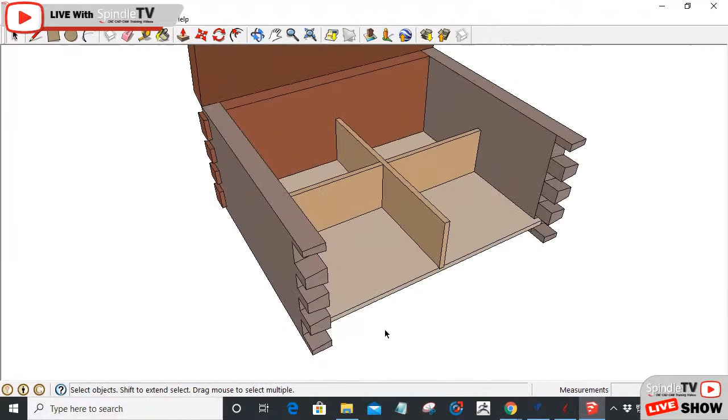This is the 3D rendering I just drew up, a rough 3D rendering of the box I'm going to be making. You can see the pin boards - I'm going to have the pin boards on the side with the tail boards on the front and back. The box itself will be 8 inches in width by 10 inches overall length. I didn't go into great detail on the lid because I'm going to be doing a 3D carving on it, so I just wanted to get the box drawn up.

Let me spread some things out here. We're going to be bringing this file into Vectric, because in Vectric you can import SketchUp files. Many of you may recognize this 3D software as Google SketchUp, which I use quite a bit when trying to visualize something three-dimensionally. I utilize it to draw with and all.

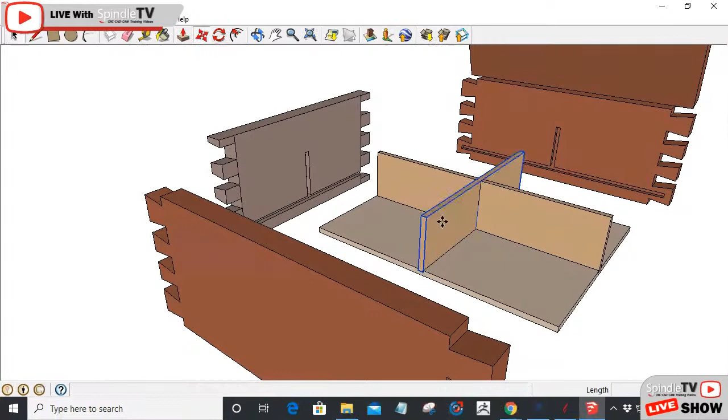In the box itself, on all four parts, there's going to be a 3/16 inch wide by 3/16 inch deep groove across the bottom for the bottom piece of material. For the little dividers, I think I'm just going to break it up into four pieces - I don't think I'm going to go too extravagant on this for time's sake.

Let me zoom in here. You'll see there are two dividers, 3/16 inches wide by, let's see, 1 7/8 inches tall, and they have little grooves cut into them in the center so they can slide over one another into the part.

Now the bottom of the part - if we hide these two pieces for a moment - the bottom of the part is also grooved, about a 16th of an inch deep for those to lay on. You'll see I have the uprights too that'll be fitting into this part, so that when this box goes together, everything will kind of lock in.

I think I'm going to be making it out of cherry. I pulled out some cherry boards. I usually like to do contrasting colors, with a darker color on the front and side, but I couldn't find any walnut and didn't mill up any maple over the weekend. So I just have some cherry that we're going to work with for the project.

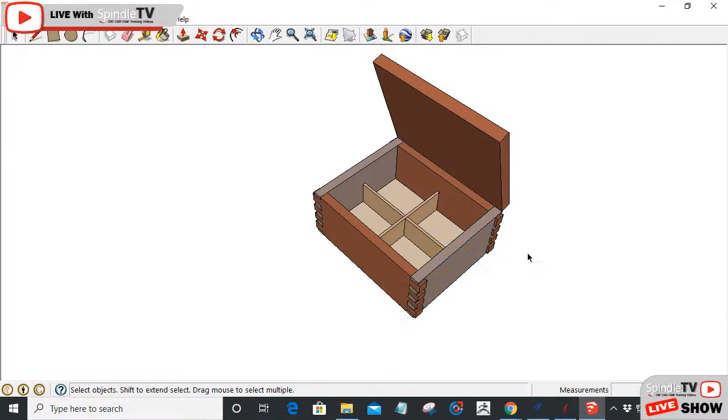We've got one part for the lid, two sides, a front and back - that's five pieces - plus two dividers and the bottom piece, for 8 total. When I go into the VCarve software and import it, it's going to tell me I have 8 parts to import. We're going to import them on the flat, only for the purpose of cutting the little grooves and cutting the dividers out of the parts.

My dovetails, we're going to be designing them separately.

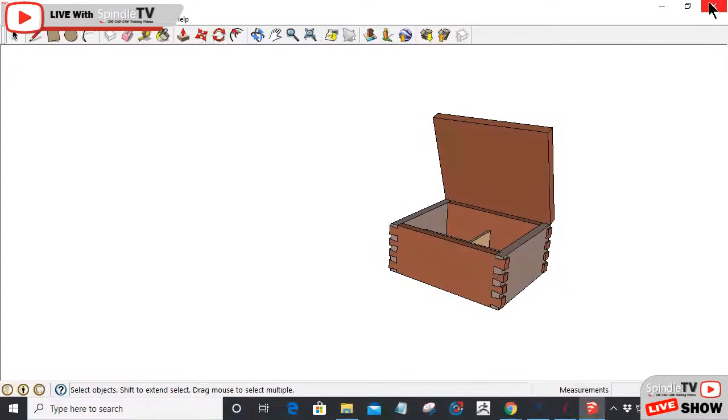So we are going to be importing a vector, and we're going to be importing the Dovetail box here. Now I'm going to go ahead and close out of the SketchUp program. Not necessarily required, but I'm going to close that because I want to get rid of that auto save. While I was working there, it automatically saves those changes in case the computer crashes or anything like that.

So I'm going to open up that Dovetail box SketchUp project here. And when it opens up, we're going to get a prompt. Now, I'm going to be doing an exploded flat view. I want all the parts broken apart. You saw my box was all together in its 3D assembly in SketchUp. Well, this is going to explode those parts and separate them. You can see here that we have 8 parts to import. I'm just going to let the software auto-orientate, and large face is the top face.

Now, if I wanted to, in my SketchUp, I could have painted the faces that I want to be brought facing up in the Vectric software with a certain color, and said orientate by material face color, chosen one of those colors, and it would bring all those faces upward. But I'm not going to do that. I'm just going to auto orientate.

Now, where the software has polygons and stuff in SketchUp, I want it to create circles for those polygons, and fit arcs to boundaries, basically trying to fit arcs to the appropriate SketchUp fillets. I want it to group the imported parts together, and I want it to keep my components together as well. In SketchUp, when you extrude a project into that 3D piece, you can take all the faces and group them into a single component, and I want it to keep those components.

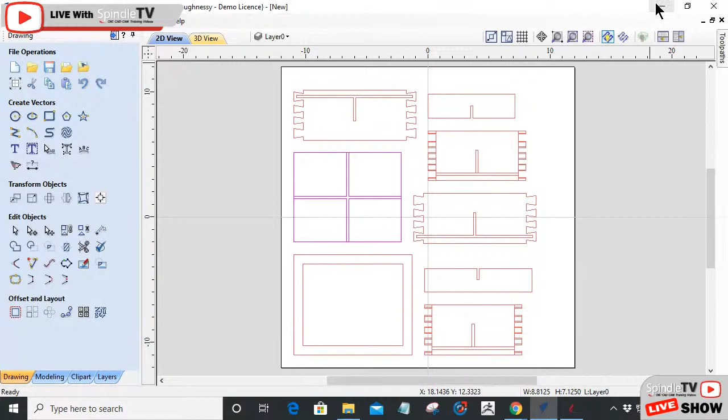All right, let's minimize this and let's get into our Vectric. Now you're going to see a lot of stuff on the board here, but we're going to kind of start over here to begin with. You're going to see a lot of numbers and you're thinking, 'Oh, we got math to do.' No, we don't have a whole lot of math.

The one thing that I've got drawn here is my clearance bit diameter, which is going to be a 3/8 inch diameter bit. Like I said, on my smaller dovetail bits I use a 1/4 inch, but this is a little bit of a larger dovetail bit, and my 3/8 inch bit will work for what I want.

It's new, it's nice and sharp, so I'm going to use it on this project. The dovetail bit itself, like I said, I showed you live. It's the Freud 22115 dovetail bit, and it has a cutting diameter of 17/32, and a carbide length of 25/32. It does have a 1/2 inch shank, and it has a 7-degree angle on that dovetail.

So simply what I've done in the Vectric software is I came in and drew that tool. Now let's go ahead and redraw it again, just so you can see how to draw the bit out. I'm going to use the line tool here. Actually, let's use the rectangle tool.

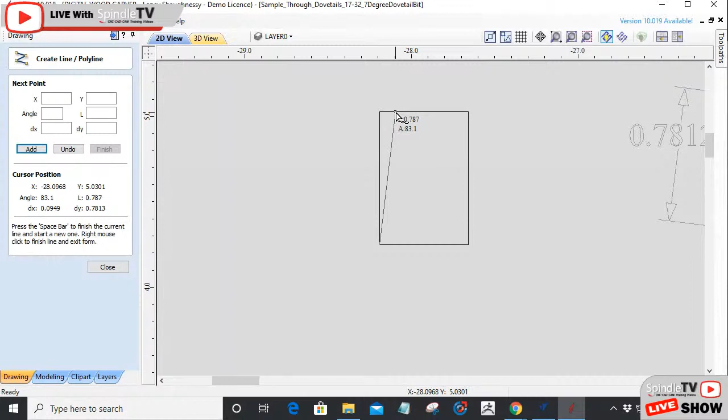Now I'm going to use the line tool, the draw polyline tool, and draw a polyline here. I need to find my angle. It's 83 degrees. I could freehand it, sneak up on 83, zoom in and try to get there and click, and I'd be done. But I want to show you how to use the polyline tool appropriately.

So I've created my start point by clicking down in this bottom left corner. You can see my line is still stuck to my mouse, waiting for some direction. I'm going to come over here to my angle, and you have to remember the software works from 90 degrees: 0, 90, 135, 180, 270, and so on, all the way around to 360. So 90 degrees minus my 7-degree angle is 83 degrees, because 0 is straight across to the right.

I want to go 83 degrees, which will give me my 7-degree angle from vertical. So 83 degrees on the angle, and the length is going to be 25/32. I'll hit equals to get that in there, and I'm simply going to click add. That's going to create that line. Now I'm going to come in here and I could either click the finish button or click my space bar to finish that. I'll just click the finish button to create that angle, that length.

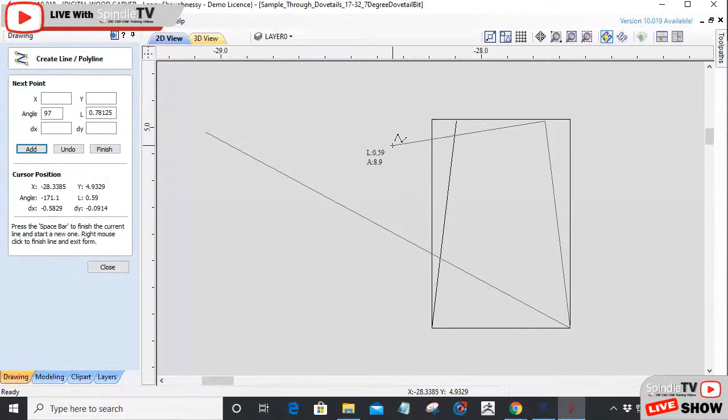Now over here, I'm going to do the same thing. This time I've clicked to start the line, but now I'm going past 90 in a positive direction, so it's going to be 90 plus 7, so 97 degrees, same length. I'm going to click add to create that line. Now notice my other line over here shot over. I'm going to hit finish to finish this line and it'll go away. That line was just there because I dragged my mouse over to click add, but as soon as I clicked finish, it got rid of it.

Now that I've got the lines drawn out, I'm going to take my box here, grab it on the top, and snap it down to the top of those lines so I can use my scissor tool. I'm just going to click here - I don't want this line at the top, so that's a span. I'll go into node editing, right click on that line, and delete that span. A span is a line, arc, or curve that is between two nodes.

So how many of you did I lose just on drawing the bit? Hopefully none - hopefully I didn't lose any of you.

Now let's get out of node editing on that bit and look over here at what I've got. Basically I've drawn out the diagram and given myself some information - what my clearance bit diameter is and what my dovetail bit angle is. That bit that I drew, which is the same as this one, I'm actually going to use it in the setup over here, and we're going to talk about the setup in just a second.

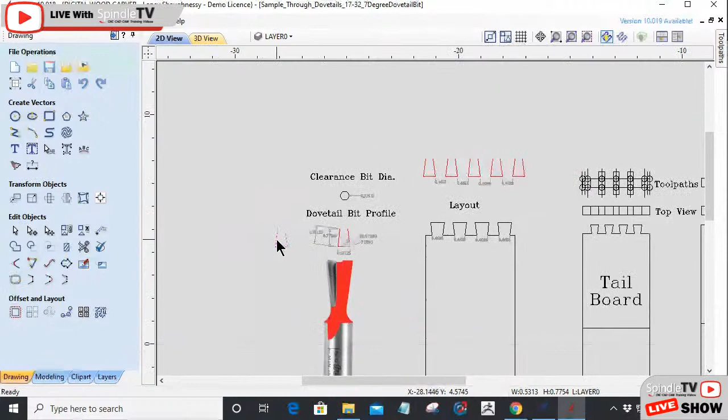Now you can see that dovetail bit - I have drawn it up here at the top. And I would like 5 dovetails to go across my piece, and I would like them spaced accordingly.

Now my part is only 4 inches wide. Let me put that 4 inches in there, and let me get it snapped to the center there.

Snap - there we go. And what I would like on my dovetails is half a pin on each end, and then 3 pins spaced out evenly.

Now how did I lay that out, or what was the easiest way to lay out how many pins I want? Because I could get rid of pins and have it as a 3-pin thing where I just have one big dovetail in the middle. It doesn't have to be the size of your bit - you can lay out your dovetails as long as your bit can cut the part. I could have one big dovetail in the middle and 2 half pins on each end. I could do all kinds of things.

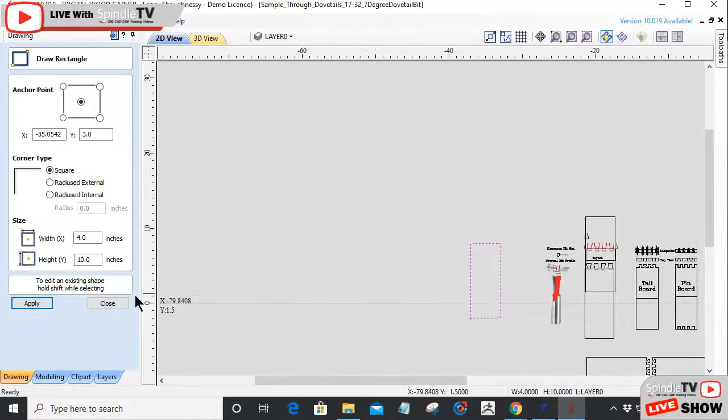Well, let's come over here into a blank spot and I'm going to draw my piece - my front piece, my pin board or tailboard, sorry, tailboard. It is 4 inches wide by 10 inches in length. Okay, so let's click over here and create that. Let's get rid of this one where I accidentally double clicked.

Now if I take that dovetail that I drew out for you guys just a second ago, I'm going to come over here and snap. I've got smart snapping and geometry snapping on, but I've grabbed that dovetail right in the center, and you can identify the center by that little diagonal mark on your cursor when you hit that center line. When I'm in the center, it'll snap right to it. So I'm snapping that right to the corner here.

Now, I will hold down my control key while I'm in transform mode. Transform mode is when you double click on the object and put it in transform mode. Or I could use this tool, called transform mode, which does the same thing when I select an object. In transform mode, my control key allows me to make copies when I drag my part around.

So if I hold my control key down and grab that part in the middle there, I am dragging a copy, and I'm going to snap it to this end. This is going to represent my 2 half pins on each end.

Okay, you guys with me there so far?

Now I'm going to grab my control key again, and I'm just going to grab this part up here. I actually want 3 more pins in between here. I want a total of 3 and 2 half pins on the end. So I'm going to hold my control key down and drag 3 more out here. Just holding the control key down.

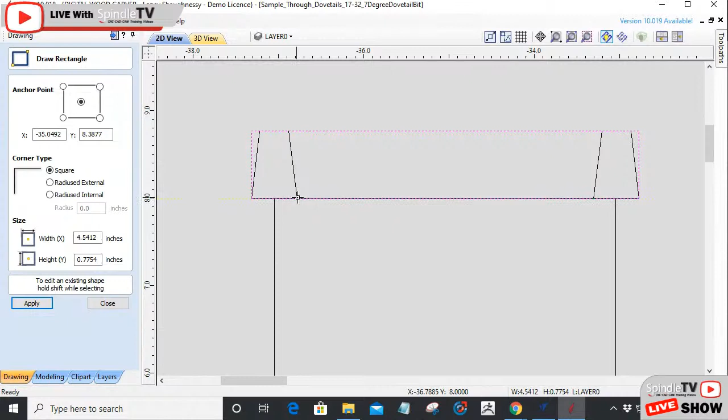I got those down. Now I'm going to utilize my alignment tool and my rectangle tools to help me lay out my pins. First thing I'm going to do is draw a rectangle that's the width of my 2 bits here. I'm also going to draw a rectangle on the inside, right here on the inside of that right side of that bit, and I'll snap to the inside left of this one. With that, I really don't need this outside rectangle, we can get rid of that. We just have this in here. I just wanted to show you my overall length.

Now, this is the space to which I want to space each of these 3 pins equal distance. Between my 2 half pins, I want these spaced equal distance between the 3, from this point to this point. Y'all still with me? All right.

So here we go. I'm going to select my 3 parts first, hold down my shift key and select my inner rectangle here. Well, inner rectangle, yeah, technically it is. I'm going to open up my alignment tool, and I'm going to be aligning to selection, aligning the selected objects to the last item in the selection, the last item I selected. So I'm going to center them right now in there, and they're all stacked on top of each other right now.

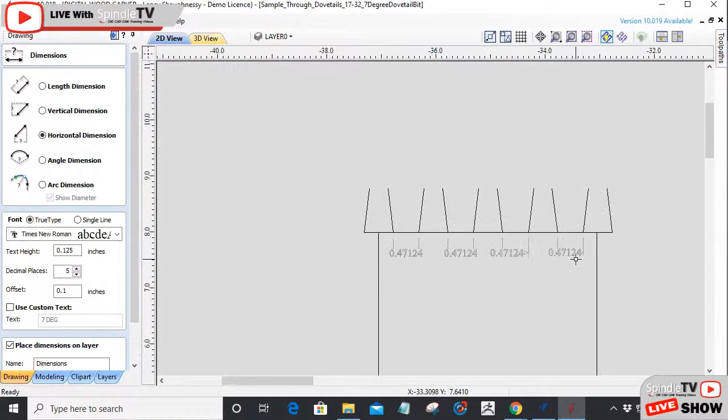Now, just for kicks and giggles, if I were to measure horizontally between each of these parts, I would be equal distance. All right, and that's the setup that I want. That's what I want, you know? So let's go ahead and close that. Let's get rid of these dimensions.

All right, now we're going to start the layout. Our goal is to end up with a part that looks like this. I'm going to go ahead and delete these numbers, they don't apply right now. So my goal is to end up with that part.

Now, key thing is, how thick is my material going to be? My material is going to be 5/8 of an inch thick. The walls of my box are going to be 5/8, and it's a heavy box—that's not a thin box. Typically walls for jewelry boxes are going to be 3/8 or half inch and everything, but I want my box's walls to be 5/8 of an inch thick.

So imagine that if we go from a side view here, imagine if I have my—let's go 0.625. Oops, not 625, let's try 0.625. And let's draw another rectangle here and make that 0.625.

When my front pieces fit into my side piece, that dovetail cutter has to cut that 5/8 of an inch thick, or 5/8 of an inch deep if you will, so those two parts can fit together. Now I'm actually going to overcut by a 16th of an inch, not an eighth. I like to have my parts slightly proud when I assemble them together, and then I will sand them flush, nice and tight and right.

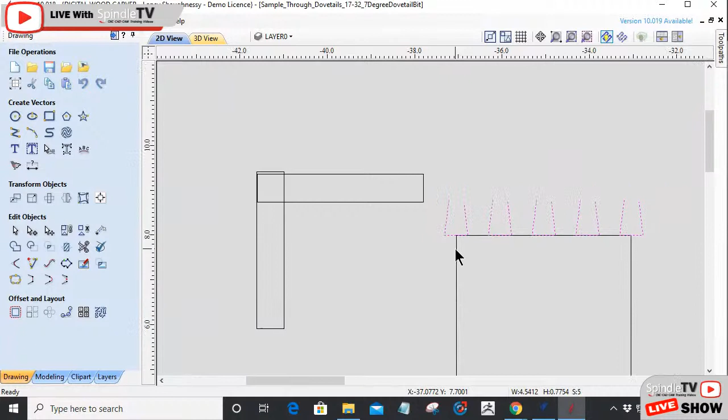So that being said, I need to move these parts down my 5/8 of an inch plus that extra 16th, right? So I'm going to come over here to my move tool, and I'm going to move relative to its current position on the y axis. Y is up and down on your screen, and I'm going to move down, so that's a negative number. I'm moving 0.625 plus that 16th of an inch, a total of 0.6875. I'm going to put my negative sign in the front and click apply.

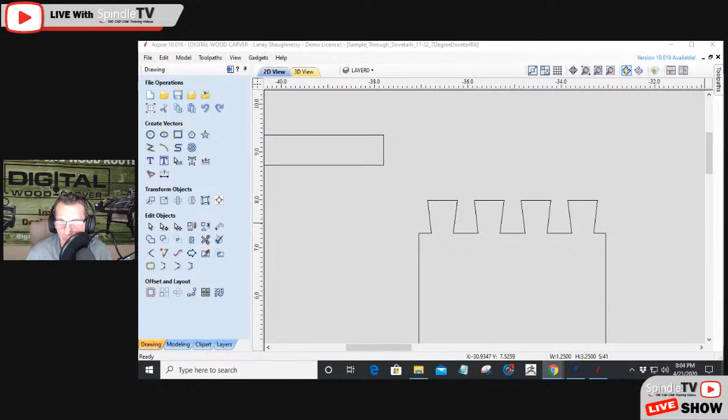All right, so we've got our tail board created. Now phase 2 of this project, phase 2 of the creation. You see these boards down here? Phase 1 is creating the layout, and that's what I did. I created the layout. So if I were to delete this box and drag this over, which you don't have to, but let's drag it over. All right, that's my layout, okay? And we don't need this over here anymore. So I've created the layout for the dovetails that I want.

Now I've got to create the pin board. And how am I going to do that? Well, this little graphic down here should give you a slight indication. It's not quite a mirror of it because these are positive, these are negative, but that's how we're going to generate that. So let's go ahead and delete these out of here. And I'm going to take a copy of my layout board, hold down the control key and drag a copy down. I'm going to hit the number 0 on my keyboard to turn it 90 degrees, hit it twice so it rotates because it rotates in 45-degree increments. I've got it laid out here.

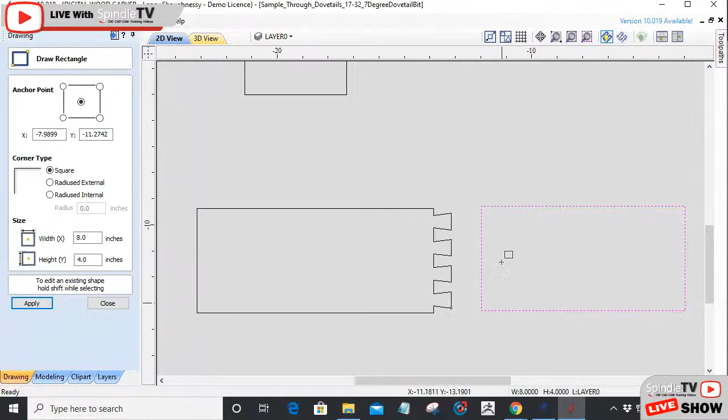All right, now my pin board - pins and tails, my pin board - is also 4 inches in width, and it has an overall length of 8 inches. Now these overall lengths and everything are not important. You're going to cut your pieces down to size. What's important is how those pins and tails are laid out, because we're actually going to be cutting on the end, like we're looking at an end view of the board. So the end view, or top view if you will, like looking at a board from the top down when it's in the vertical position.

Now, if I came over here and took this piece and snapped it right to here, you would think I'd be able to just cut the vector here, copy and paste it, and then trim everything together, blah blah blah. And it doesn't quite work that way. What we want to do is use our tails so that we can draw our pin layout. We're going to actually use the Polyline tool for this - it's just going to be a series of clicks. We're going to click at the edge of our board here, come and click on this inside corner, click on this end over here, inside, this one at the end, over here on the inside, and I'm just clicking. When I get to that point, I'm clicking.

This is much easier in 9.5 and 10 with the smart snapping and geometry snapping, but I used to do this in version 8, 8.5, 9, and 9.5, using the space bar to finish the line. So it can be done on all of them.

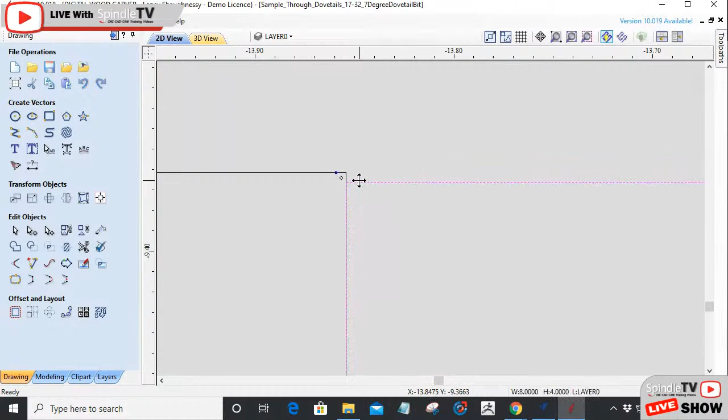Lord have mercy. One more time. Y'all needed to see it again anyway, right? All right, one more time. So here we go, we're going to start at the edge. I should have checked that before I started talking smack. All right, let's go over here, and we're redrawing.

All right, space bar to finish off the line. Now I have this polyline, and I'm going to hold down my shift key and select this, my pin board piece, and we're going to slide it back. And there's our layout here.

Now that I have that drawn, I'm going to come in with my trim tool, and I'm going to trim away in between these lines to create that negative layout.

Now I've got these two lines right here overlapping, don't want that. So I'm just going to take my trim tool and click it once, and that should have joined that one. You can see my other individual lines right there now - I can select them and hit delete on the keyboard to get rid of those.

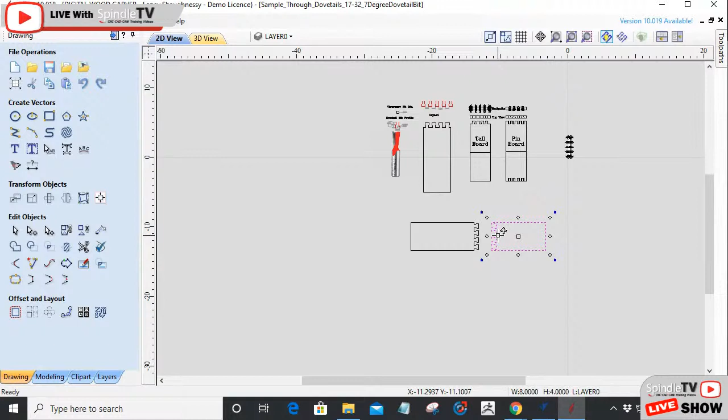Now, phase one was layout, getting the pins laid out. Phase two was creating the tailboard. Now we're into the final phase, setting both of our pin board and tailboard upright and creating the vectors for the tool paths.

So I'm going to hit the number 9 on my keyboard this time and turn that vertically counterclockwise. I'm going to hit the number 0 on my keyboard and turn this vertically clockwise. And this is going to replace...

Let's get rid of this, and this. Hit delete. And we're going to bring these guys up into place.

Tried to lay this out the same way I learned, but also for you guys. Now notice I didn't make copies, I just brought them up here. I don't really need that layout down there, but layout too, you know.

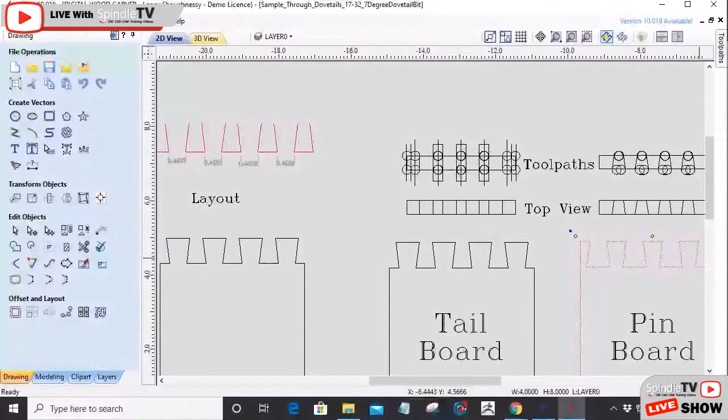So hopefully y'all are with me and this is not boring to death, but we are reaching the final round here. Now at this point in time, you can see I have all these layers from past projects and everything, and what I want to do is start fresh with you guys and girls.

So I'm going to come in here and turn off the vectors over here, which is going to be my board in a moment. You'll see that job setup in a second when we get into the job setup.

I'm going to add a new layer and I'm going to call this - evidently it's going to yell at me for that, there we go - I'm going to call this our class tailboard, and class pinboard.

I'm going to take these two vectors here and here, and I'm going to move them, well, one at a time, Laney. Tailboard, I'm going to go ahead and move it to the tailboard layer.

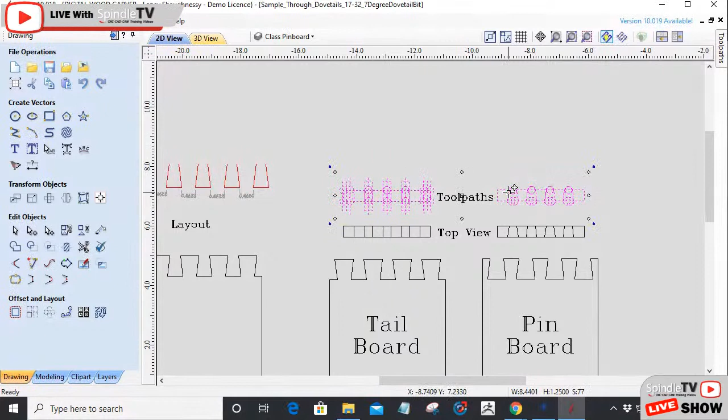and all of this, and I'm just going to move it up out of the way. It's going to be in your eyesight, you'll be wanting to stare up at it, but we're going to draw two new boxes. Same thing with this and this, we're going to move that up here because we're going to draw two new boxes.

So our boxes are going to, you guessed it, be the size of our part. So 4 inches wide by the thickness of our piece, because we're looking at a top view, 0.625. Okay, and I'll have to move this all over. Let's do this one. 4 inches wide. 0.625.

All right, let's get some things lined up and cleaned up and everything here. Move that to the side. And for those of you with OCD, let's get that somewhat centered here. I'm gonna drive y'all nuts, you'll be like 'I can't pay attention, Laney, man, get that shit fixed.' All right, let's go over here and slide this over a little bit.

And let's take this and slide it over a little. Now, the key to all this is we absolutely have to have things in alignment for these two boxes for this next layout procedure. So I'm going to snap to this edge here and then just bring it straight up so that I'm in alignment. Same thing here, I'm going to grab this one right on the corner, snap down here, and then just raise right up along that dotted line.

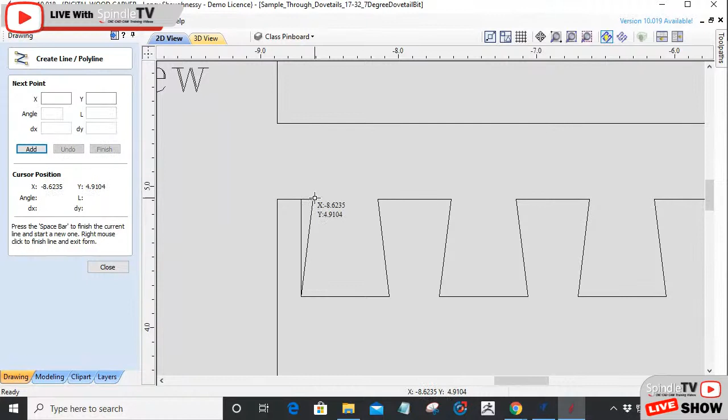How we get it to look like a pin board is we're going to draw some vertical lines from all of our points, our inside and outside points. What I mean by that is from this outside point here, straight up, 90 degrees, space bar to finish. And this inside point right here, straight down, 90 degrees, space bar to finish. Here, straight down, 90 degrees, space bar.

And on this corner, straight up, 90 degrees, space bar. Now, if I came in here with my scissors and trimmed away those two middle lines, what we're getting is a representation of that angle, that offset angle. You know, you got to use your imagination on that.

And so we're going to repeat that for all of these. It's important that we do because we got to extend these lines up into our part up here. So we're going to go straight up. That was not straight up, I'm going to undo that and undo that. There we go. I accidentally clicked when I shouldn't have.

Space bar to finish. Over here, straight down, space bar to finish. Here, straight down, and here, straight up. All right, I'll come back and trim those lines. Let's just keep going with the Polyline tool while we're at it, on the inside and outside corners. So the outside corner here and the inside corner here, we're just snapping and drawing a 90-degree line up and down.

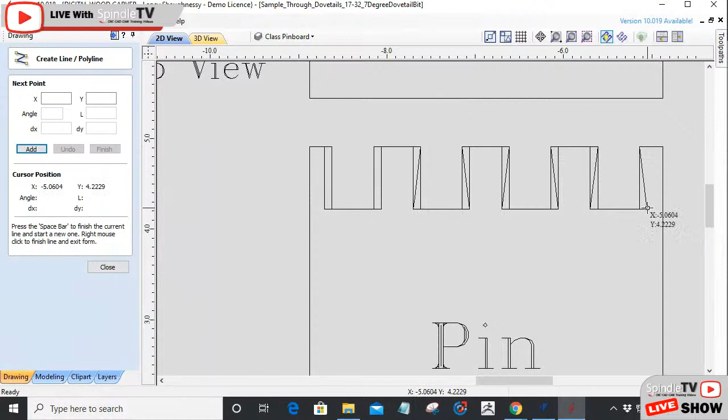One more. All right, now I can come in with my scissor tool and trim away those diagonals. And now we have an official looking tailboard and pin board.

Okay, all right. Now, for those of you that may be just slightly lost on that pinboard tailboard, let's open up our 3D view and take a look at them in a 3D rendering real quick.

All right, let's go in here and let's take this piece, this piece, this, and this, and let's hide those. And let's look at, let's move this one out, and let's take a look at this one here. Now I'm going to rotate, I'm going to orbit around this one here. And on this side here, let's go with a straight camera view, camera, standard view, front.

How about back? Camera, standard view, back. There we go. All right, so this is my tailboard or pin board. Yeah, tailboard, sorry, this is my tailboard. Let me get the blue off there. And let's spin it around here. So very straightforward as far as that tailboard goes. Same thing as what we're looking at here.

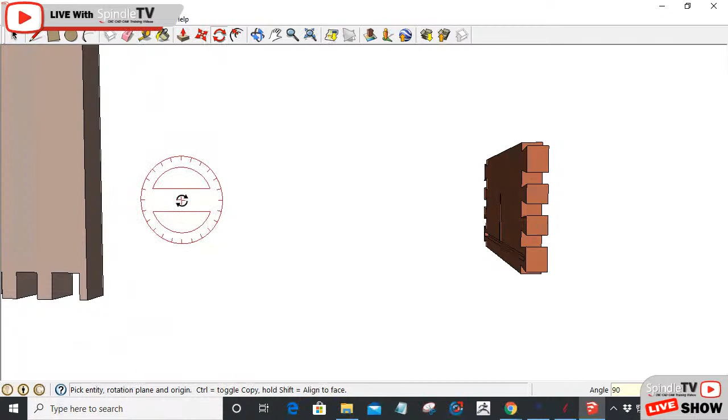Let's look at it from the end, and I'll tilt this ever so slightly. That angle we're seeing, those lines we drew, if we put this in a vertical, that outside line represents the outer part of that angle, and the inside line here represents the narrow part of the angle. So that's what we're looking at when viewing it straight on.

Now, the individual boxes I drew up here where we're extending our lines, that's basically going to be a representation of a top view. If we were looking at this board from the top down at that end, that's what we're going to be creating next.

So when you were looking at that vertical piece and wondering what those lines were doing, it's basically kind of emulating, in your imagination, that offset of that angle cut. All right, cool, let's get back to it. Now you can see it, right? Your eyes are like, oh, I see it now.

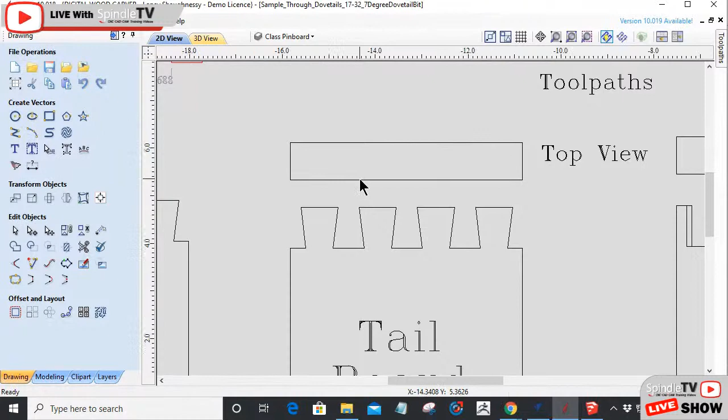Now what we have to do is extend these lines up to create our top views. On our top views, we have to extend the lines up, and basically we're looking at the top view of the tailboard here. It's just a box with lines in it. But the pin board is going to have those angles you see there.

I'm like, how did you get that? All right, let's figure that one out. So coming back up here, we have this is the pin, and the gap between the pins. The wide ones are the gap between the pin, then the pin, the gap, the pin, right?

So what we're going to do is create, with our polyline tool, basically from down here, extend a line straight up. Actually it needs to be on the top of the pin. Straight up, space bar to finish the line, repeated for each one.

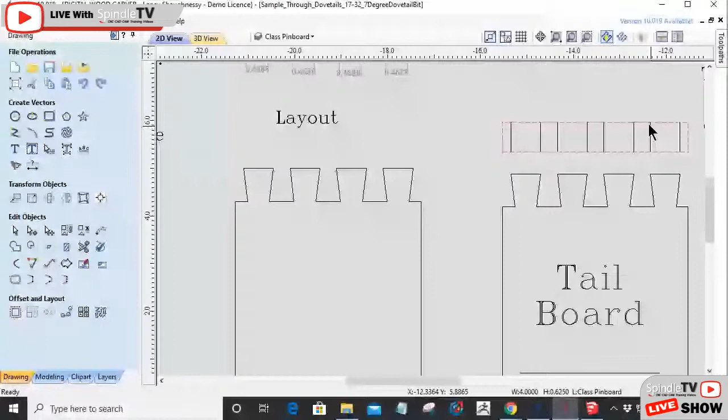Because our router bit, our tool paths are going to be cutting here in these areas, that's where our router bit's going to be cutting. Not at an angle like that, or it'd be a bad day for it. All right, so we've got that one drawn out.

Now this one, we've got to be able to pocket out these areas. And for this, we have basically a line where our angle is going to start and where it's going to end, to create that offset, that angle cut. So let's get that one drawn and see, we'll do one and you can see where I'm going with this.

So now on this one, basically I'm just connecting that to here, and this one I'm going to connect here. And if I were to connect a line from here, I could come in with my scissor tool - that would create that first angle that's in it. We're going to do that all the way down and then come back and clean up our lines.

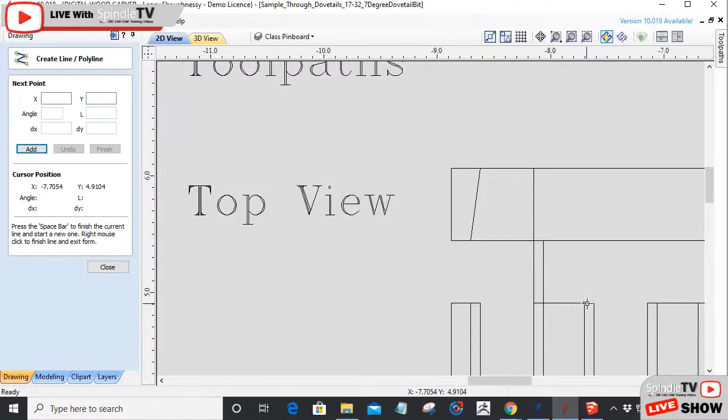So this is the inside of the angle - inside line is short, outside line is long. I'm hitting the space bar after I click to lock in that line, hitting the space bar to finish the line. Outside line is long, inside line is short, inside line is short, outside line is long.

We're getting there, we're almost to the fun part of creating the toolpath layout. Hopefully y'all are finding something helpful in this. Outside line is long, inside line is short. All right, with my line tool, I'm now going to connect these two points.

Just connecting these two points, the short line to the end of the long line. Then I'm going to take my scissor tool and get rid of all these cross lines here, and then my straight lines here. All right, and that is a top view of my pin board.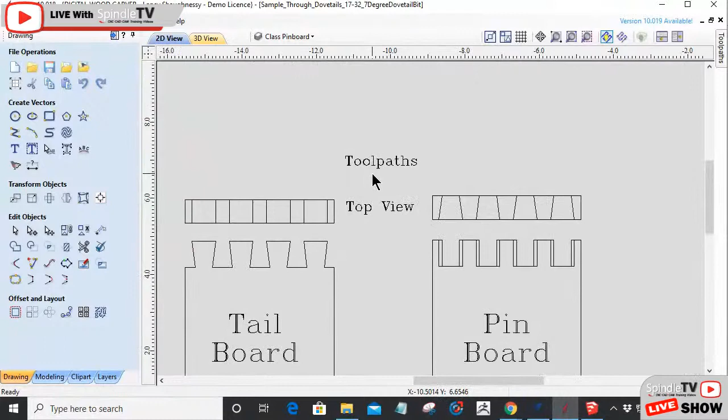Awesome. All right, now the fun part. Now comes the layout for the toolpath. Now this is going to involve our diameter of our bit, this is our end mill.

So all the circles here are representing a drilling toolpath that our bit is going to come down and drill to hog away the waste material. The lines here are going to represent an end mill cut, on these short lines here, not this long one. The short lines represent where the end mill is cutting to hog out extra waste material here and here. And then the long lines represent where the dovetail bit are going to be cutting.

And the rectangles kind of represent a pocket cut. Over here, we have a drilling toolpath where these circles are, and a pocket cut where this kind of cam is created. That's for the tailboard. So that's what we're going to be doing here.

Okay, so what we're going to do is take our parts, our top views, and simply select them. Hold down your shift key when you want to select more than one item. Double click to get it in transform mode. I'm going to hold my control key down and drag them up here to the toolpath section.

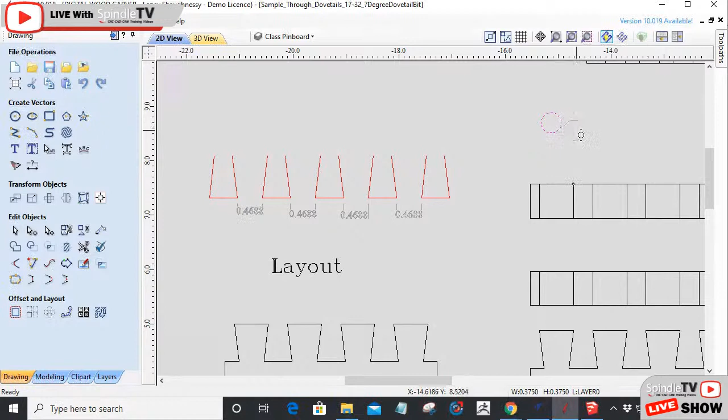Now, first thing we got to know is I'm going to come back over here to my end mill. I'm going to hold down my control key and drag that end mill over, because that's going to represent the end mill I'm going to be using, my 3/8" bit. Now, the key thing is that bit is going to be drilling in these narrow voids here, and it has to fit. If the bit won't fit, then you're going to be cutting into your part and all that stuff. And right now, as my layout sits, my end mill is not going to fit.

So let's measure and see how off we are, because I may have to go back to my 1/4" end mill that I use every day. This was the first attempt of wanting to use a 3/8", but not going to have it.

So let's see here, let's grab a horizontal measurement from here to here. All right, 0.362. 0.375 is my end mill bit, 0.362, it's not going to fit. Okay, so I do have to use a 1/4" end mill, which is fine.

What I'm used to using all the time. I just thought I'd be able to use my bigger bit. And if my dovetails were spaced out further, then I would have been able to use it.

But so we're going to change this up real quick. We're going to come in here. I want to keep things consistent, so I'm going to go into the size tool and change this back to 0.25.

And I'm going to go into my measure tool. I'm going to measure an arc with the dimension. And if I click on this, I can drag that out and click there, 0.25" diameter.

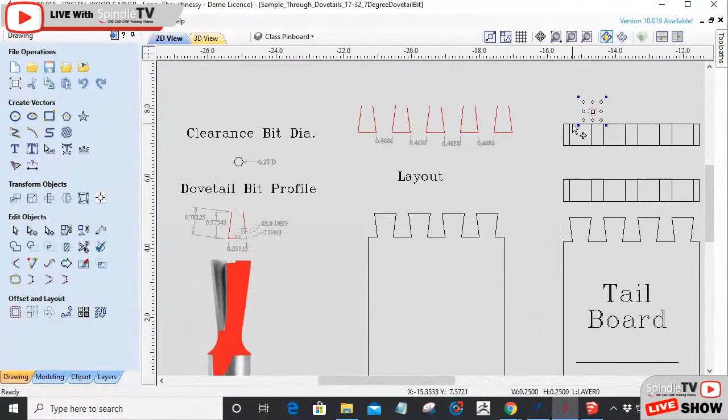All right, so on our layout now, what we need is all of this. I wish I could... here, let me see if I can. Bear with me a second, let me see if I can do something. Let's go... W, no, not there. 0.125.

W for waste. And that's what's centered. And this is my T for tail.

Okay, let's take these two and hold down that control key. Drag this over here, let it go. Hold down that control key, drag that over there. That up for a minute. That over there. And snap.

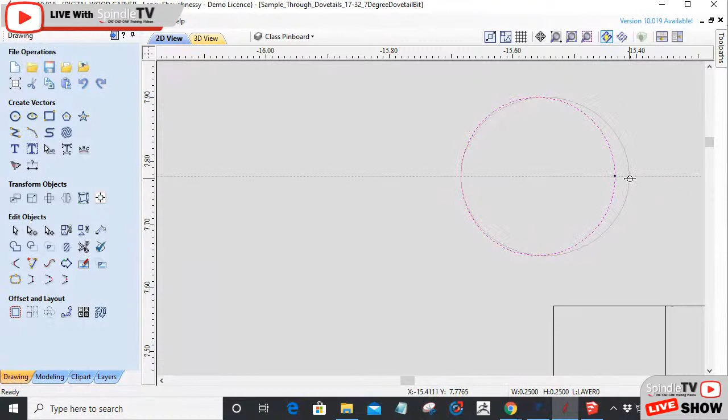And that's what I wanna drag that by. I don't wanna drag it by this because I'm stretching that little white box. I wanna drag it by the actual line on that node because that's gonna give me the point that I can snap the center of my bit to the edge of my cut on that waste area. So there's gonna be a drilling tool path that's going to carve away that waste material here, right?

Okay, same thing. I'm going to hold down my control key and let's get this kind of front and center on the screen like that. And I'm going to hold down on that edge, hold down my control key, grab that, and snap this there. So that's my second drilling operation.

All right, it's going to drill down and remove that edge waste. It's going to help me, to the best of my ability, prevent tear out. If I'm just going back and forth clearing out like a pocket with the end mill, I have a tendency of creating tear out because I don't have a backer board. This is also going to help reduce some of that waste on my edges to remove that tear out and stuff.

Now, my 1/4 inch end mill, because of the size of the waste area, that one cut will do the two ends. I don't need to double it up like you see up here, because my inside area is not as wide, right? I'm using only half a pin here, and it's less than a 1/4 inch wide.

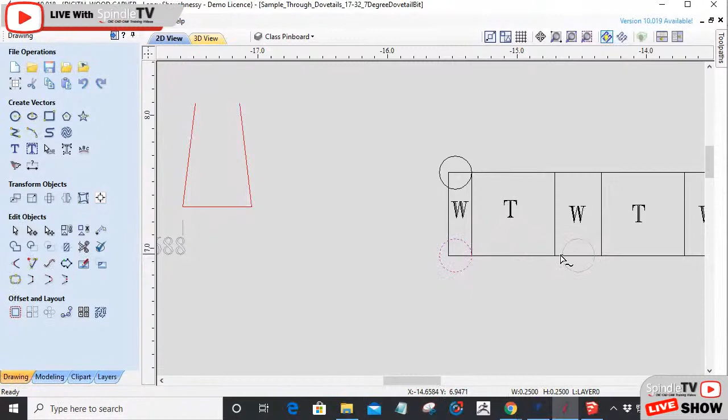Okay, grab this side, hold down my control key, and snap to this side. So the bit's going to drill down here, it's going to raise back up and drill down here, and it's going to remove this section.

All right, now I can very easily hold down my shift key and select both of these and hold down my control to copy. The reason why I held the shift, for those of you that are new, is when you're selecting more than one object, you hold your shift key. Okay, I'm going to double click to put it in transform mode.

And I'm going to grab that left corner, or left edge should I say, and I'm holding my control key so I can make a copy. And I'm going to drag that copy and snap it up here.

Y'all awake over there? I should be like Emeril Lagasse and go 'bam' every once in a while, make sure y'all stay awake. Don't fall asleep, all right.

Let's go ahead and again, I'm going to grab it - doesn't matter what side I grab, I just make sure what side I snap to over here. And I'm a left handed person, so I'm grabbing from the left.

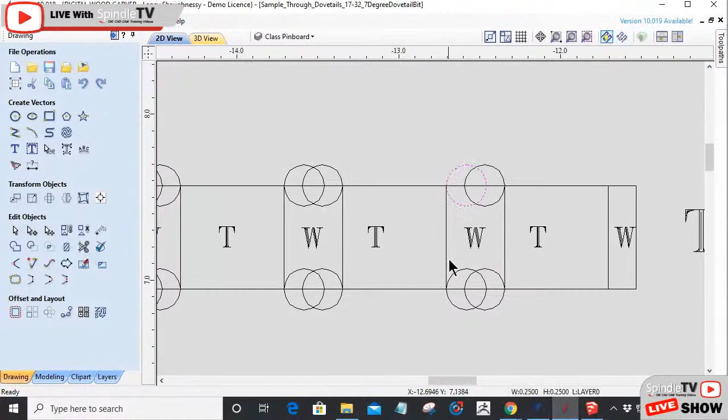I'm going to hold down my control key and drag a copy over, snapping it inside there, snap it to there, and snap it to there in those waste areas. Then, I don't need two circles for that, so I'll hold down shift, select these two, put them in transform mode, grab it at the bottom, hold control down, and snap those two there. So those are the vectors for my drilling toolpath on the tail board.

Okay, the circles are the vectors for the drilling toolpath.

Now with that same quarter inch end mill, I'm going to have it do a clearing pass on this outer edge again to prevent tear out. This one's not as wide, so it's just going to do one clearing pass on this outer edge. The center of these circles represent the center of my quarter inch router bit.

So I'm going to use a line tool now. The line is going to be my vector for my profile toolpath. I'm doing a profile toolpath, and I'm going to snap right to the center of this circle here and snap to the center of that circle there.

Now that line, I don't want my bit to start here and end here. I need it to extend past the part. I want it to start outside the part, travel through and past the back of the part, raise up, come back over, take its pass, raise up, come back over, take its next pass, and so on until that area is cleared out down to that 5/8 of an inch depth of cut.

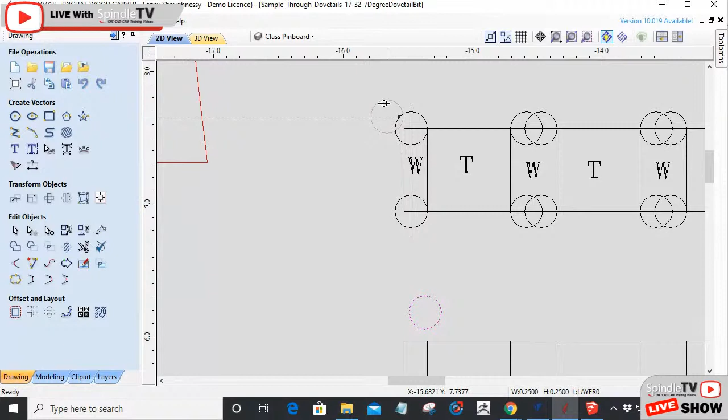Okay, my profile vector. Now completely opposite of this side, I started down here for that climb cut, but coming back over here, I'm going to have the router do a conventional cut in this direction to not tear out. So my start point is actually going to be up here for this one. So I'm going to climb on the left, conventional on the right.

All right, let's go into here. Again, I'm going to find the center of my circle, snap to that and to the center, space bar to finish. I'll select that line and size it from its center up 1 inch to 1 inch, and that'll extend in both directions that 1 inch. So that's my two end cuts.

Now in here, my bit is going to be making 2 passes. It's going to drill out this area here, this waste area. If the area was wide enough where there wasn't a whole lot of waste, I could just do a single pass, and I may just still do a single pass if it were narrower grooves.

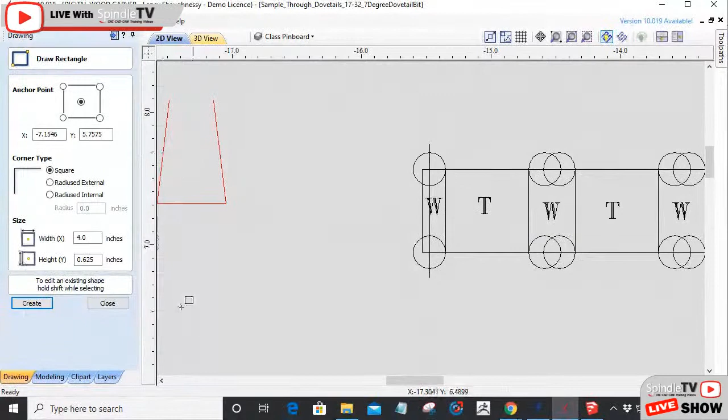That's what those rectangles are there for, and I'm an idiot that I almost forgot that—I would have had you running profiles in the middle. All right, pocket cut, ladies and gentlemen. So in here we're going to do a pocket cut, and I'm going to grab a rectangle tool and draw a rectangle here, and that rectangle I want to be 4 inches in length.

Okay, so it's going to come in and pocket this out here with that 1/4 inch end mill. And it's also going to pocket here, here.

Now, when I clicked over here on this one, it wasn't centered, right? Don't make that mistake. Go back and look at your vectors and all that good stuff. This one got moved. It's got to be right on the line, ladies and gentlemen. This one here, I overshot in this direction because I was full of myself. And this one here, I got just right.

All right, so the rectangle vectors, the drill out here is going to drill out to prevent that chip out on the edges. And then my pocket cut is going to come through and clean out the rest of that waste material down to that 5/8.

All right, almost done. We got one more cut, the actual dovetail cut. Now, the dovetail cutter. So all this is going to be cleared out with our end mill. Then our dovetail cutter is going to come and cut those dovetails, that angle cut, that final angle cut.

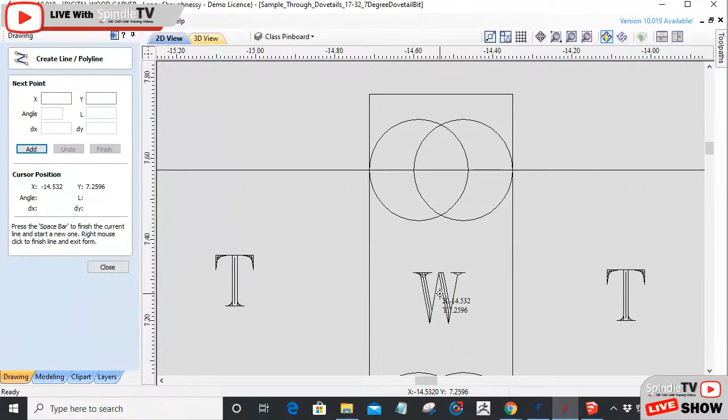This time I want to find the center of my rectangle here because that's going to represent the center of where my dovetail bit is cutting. And the dovetail bit is going to be cutting right through here.

Okay, and on this, my dovetail cutter is much wider in diameter, right? So I need, and I'm going to hold the shift key down. Hold the shift key down. I need to extend these lines a little bit longer. I'm going to draw a circle here that my dovetail cutter just in 17/32.

Let's hit equals. If I click here, okay. So again, the center of my bit, right? I don't want my bit coming down right on the edge of my board. I want it coming out way off my board and everything, clearing its path. And also, if I want to be, let's say, that far off my board, there's my center, so my line has to be extended out to here on both sides.

Okay, so on this, what I'm going to do is I'm going to hold down my shift key and select all three of these. I'm going to put it in transform mode. And this time I'm going to hold my shift key to keep these objects centered. But now I'm going to drag this line and stretch it out.

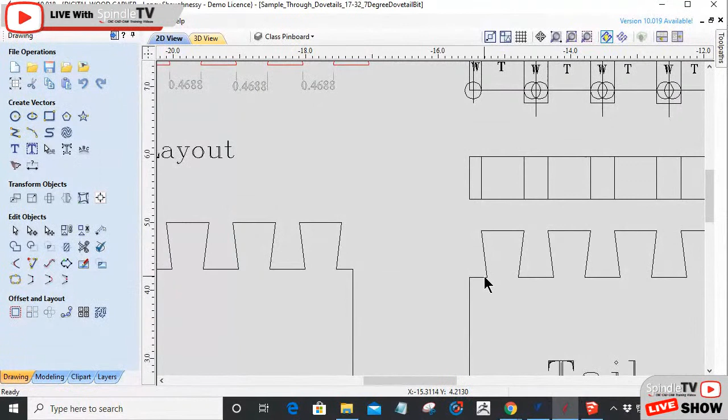Okay, now my dovetail cutter also has to come in and cut these edge cuts here, right? So I need to know where that vector line needs to be on both ends. So if I take and snap the edge of the bit, which this line here, got to understand something here. This line here, right here, this vertical line is representing this upper part, right? It's not representing down here where the actual edge of my dovetail is.

So what I need to do is I'm going to draw a polyline, a very long polyline from here all the way up to here. And that's going to represent the edge of where this 17/32 cutter needs to cut. Let me undo that line there. Let's get back into regular mode here.

And so, that edge of that cutter needs to cut here. All right, that's where that cutter's cutting. Now, the center of the cutter is way over here.

And so if I were to use this line to make a copy of it, hold down my control key and grab it at the end, I could snap to that. And that gives me the vector line that my dovetail cutter has to follow.

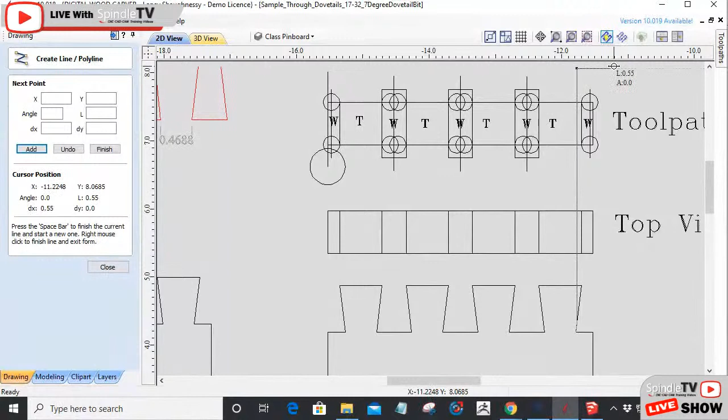Okay, same thing here. Let's get rid of that. We don't need that line any longer. I'm going to draw a line representing the inside of my cut. This is why it's important that all these things be lined up together in a row, because we work off of them. Draw a line 90 degrees straight up. Space bar to finish. I can take my circle, drag it over here now.

Okay, I want to get the center of my circle in line with that line there. So I'll snap it right there. Now I'll use this line, hold down the control key to make a copy of it, and snap it to the center. That's going to be the vector line.

So we've just finished creating the vectors for the tailboard toolpath.

Now I'm going to take all of these vectors, right click, and copy them to a new layer called class toolpath vectors. I'll put TB for tailboard. And that copy, while it's still selected, I'm going to drag it over here because we'll be using it in a few moments to set up our toolpath.

Sprite, yeah Cecil. I stopped drinking Dr. Pepper. It put me in the hospital, so I had to start drinking Sprite instead. I was supposed to be drinking juice, but I couldn't give up soda altogether. When you're hunched over crying like a baby because you're passing a kidney stone, it's time to give up some Dr. Pepper. That's the worst pain I ever experienced in my life. God bless women who can endure pain.

Okay, so now we've got to create our toolpaths for our pin board. Very similar to the tailboard, we're going to have drilling operations, and then we're going to have a pocket cut.

So I'm going to snag one of these quarter-inch circles over here, hold down the control key so I can drag a copy over here so we can use it. Why draw what you can copy? And here, if we need some W's and T's, let's drag a couple of W's and T's over too, holding down the control key.

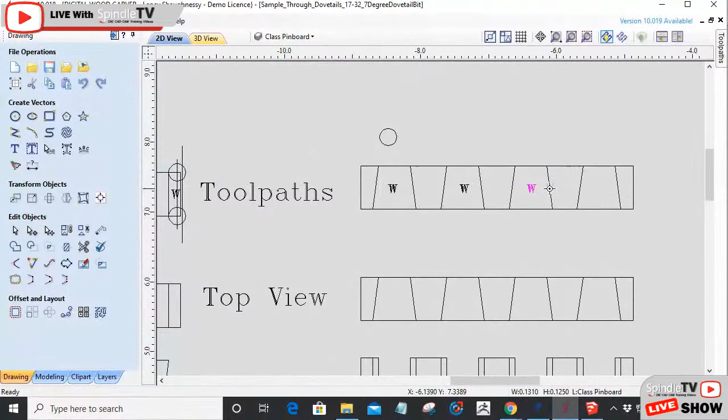Let's get rid of the W or the T because it's not a tail, it'd be a pin, but we'll use the W. This is our waste area, hold down that control key. This is our waste area, and this is our waste area. That's the area that we're machining to remove.

Now, once again just like before, I'm going to grab the corner of this and come over here and snap to the edge. I'm going to hold down my control key, grab this edge and snap over to here. And then down here, hold down my control key and snap to this edge.

I'm going to try to snap right into the middle of these two. Let me see if I can do that. Can I snap to the middle? I don't think it'll show me the middle. That's all right, we're going to find that happy middle where I got just enough overlap.

All right, and so that's going to come through and clear out that waste area.

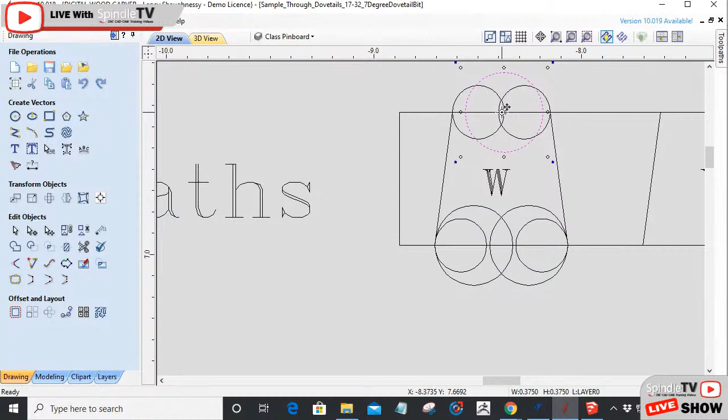Let me find out, just for kicks and giggles. 0.375. Oh yeah, I think I would overlap. Will my 3/8 inch end mill fit up in here? Oh yeah. Okay, all right, let me see here.

For consistency's sake, for you guys and all, we're just gonna stick with the 1/4 inch end mill. If you were doing something like this, use the optimal tool path or tool to meet your needs and all that stuff. But for right now, I'm just gonna stick with the 1/4 inch.

So I'm gonna grab all of these and hold down my control key, and I'm going to snap. Are you not gonna snap for me now? Oh, it wasn't snapping because it was holding the shift key, not the control key. There we go, that's how you snap. All right, let's go ahead and drag this over and drag this over. Okie dokie, tokie dokie. All right, good to go, good to go.

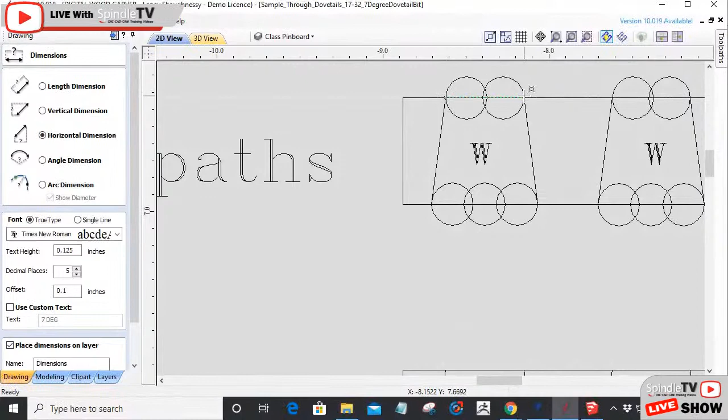Now, just for kicks and giggles, I want to see how good I am here for a minute. Not good I am. I want to do a measurement here. I want to measure from here to here, and I want to measure from here to here. 47124, 47124. That's good, okay.

Who is calling me on a Tuesday night? Okay, sorry about that, I'll call him back. Whoever's ringing me, I'll call you back.

Okay, now here we go. Now we are going to create the pocket cuts because this is the drilling operation. Again, the drilling operation is going to drill down in a series of steps to help reduce the chip out on the edges. And then we're going to have a pocket come and clean up all of this and flatten it out.

Now, on the pocket cut, I'm going to utilize the tangent tool to connect these vectors with a tangent and everything. So what I'd like to do right now is create a new layer, and on this new layer, I'm going to call this layer my pinboard pocket vectors.

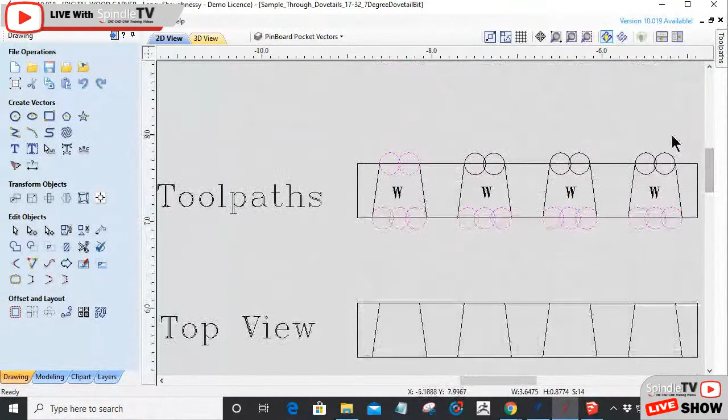And I'm going to take these vectors here. Sorry about that little screen jump. And I'm going to copy them to that pinboard vector layer for a minute. And then, to hide all of that other stuff, I'm going to shut off all these other layers except for these vectors. So I got everything shut off, closing down everything, and all I have left is just those circles right there, because we're going to use them.

So what I'm going to do is take my line tool here, my Polyline tool. Make sure you're in the proper layer that you're working in. I'm going to click on one of these circles and then hover - I'm not going to click on this other circle, I'm going to hover over it and hit the letter T on my keyboard, and that is going to snap. It's snapping now.

Bear with me a second. Are you not going to snap? Bear with me a minute here. Don't you argue with me.

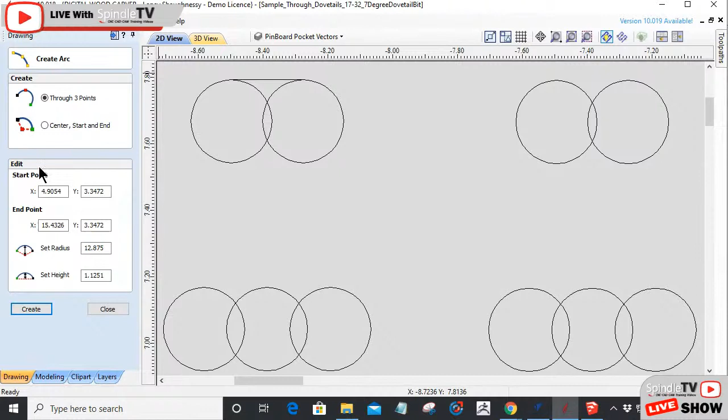Let's try that one more time. It shouldn't be doing it because of these overlaps here. Should click, hover, letter T.

Is it? All right, hold on a second guys. We got to fix, we got to find a problem here.

I'm gonna get rid of this overlapping one here just for a minute, just to see if that's what it is. Click, hover, T for tangent. That's my T key, it's broke on my keyboard. What in the world?

Wonder if that's from my update. Oh damn. That T should snap right to my tangent.

All right, that's fine, well we're gonna find. I'm gonna just automatically snap to the tangent of the circle. Maybe the T key was in version 9.5. Maybe they did it automatically where it now just snaps with smart snapping. Let's find that, let's find out. Hold on a second, let's see if that's true. Maybe the T is no longer required.

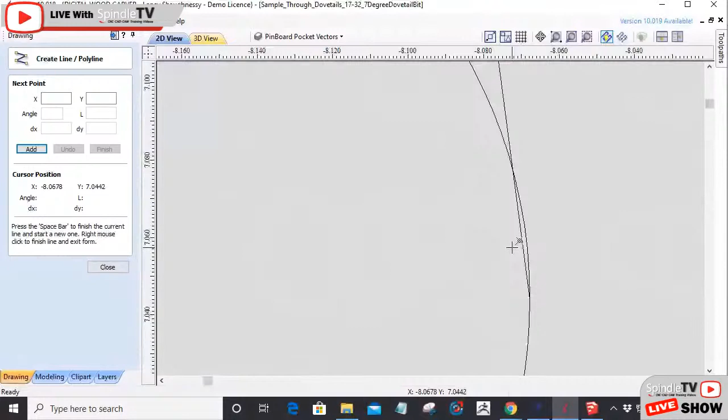Interesting, interesting. All right, no problem. We'll continue on with what we got to continue on with. But it would be nice if it did snap to our tangents. Right now I'm just using the center points of the vectors.

I will figure out what that is and why it's not working. Let me pop over here real quick, let me see if VCarve Pro, circle, click, hover, T. See, that snapped me to my tangent.

What's up Aspire, that worked exactly like it's supposed to. Even if I'm way up here and I hit T for tangent, it snaps me right to that tangent, both lines. Space bar, and come in here and trim, and there's my cam.

So why isn't that working on Aspire? I'll have to figure that one out. It might be because of the update, that might be a patch or fix in this version I'm running. But that's all right, we'll still make it happen here.

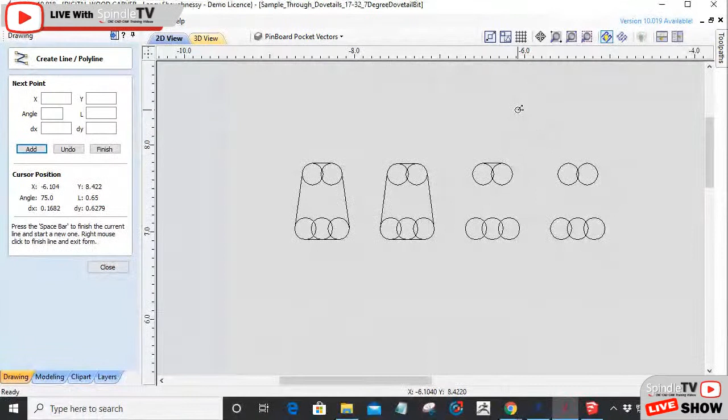T is the tool for tangent, the keyboard shortcut. I'll have to figure out why my Aspire isn't working like that. But I'm just snapping to these center points, which will get me where I need to get.

All right, so with that I'm going to come in here and trim away. I'm going to trim away these vectors to create that pocket.

All right, and then I've got this little guy, so we'll get rid of him and him, these outside little circles here, which is fine - my dovetail bit will come in and clean up wherever it couldn't get.

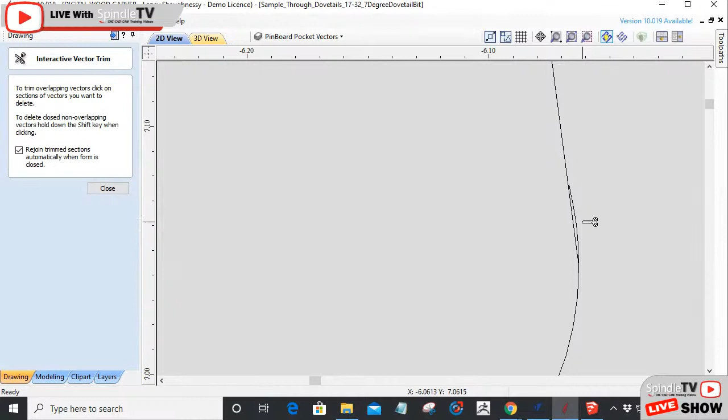All right, 2 more to do, just trimming away these inside circular areas here. This outside here, this outside here. Sorry about the in and out, just trying to move along.

Okay, one more. Control Z to undo.

That disappoints me, my tangent tool didn't work, but there might be a reason. I have to go back and just research it. It takes me a second to figure out why it's not working, but now is not the time to do that. If I figure out what it was, I will definitely let y'all know.

All right, so now I have the vectors for my pocket cuts. So I can go ahead and turn my other toolpaths back on, my other vectors and things. And so I have the pocket vectors, and then I have my end drilling vectors. So that one is done.

That's my pinboard vector, so again I'm going to make a copy of these. Hold down my control key and drag a copy over here. All right, now let's get rid of these vectors here, and let's go look at our job setup.

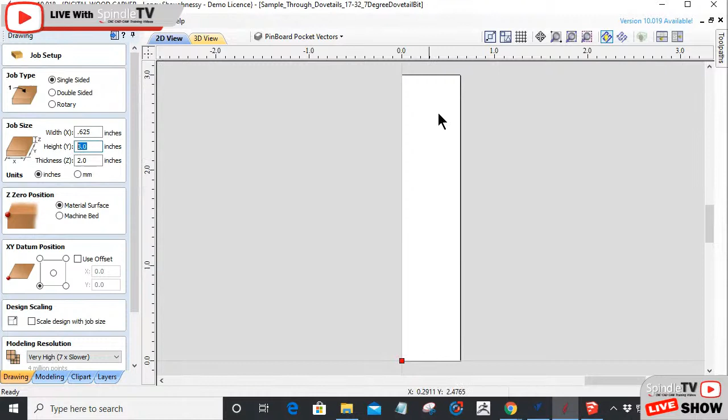So our job setup, our actual job setup now - my board is going to be 0.625 inches wide. The board is 0.625 inches wide. The height basically represents the width of the board, which is 4 inches. I'm so sorry, which is 4 inches. And the thickness, I'm going to put 2 inches in here just so I can see an end view. When I've got this turned to its side, I want to be able to see that 2-inch end view and stuff.

So now I'm going to be working - if I were to draw out my CNC machine for a moment, just so you can kind of get an idea here. Imagine that this is my CNC machine here, and I've got my gantry, and we'll just pretend that's a round router.

This is my joint making jig. It clamps onto the table and has the vertical piece and everything that goes down.

This part here is going to be clamping to the jig on that table. On the outside corner here, this bottom left corner, that's where I want to start from. I want my bit to start out here and then go around and do some drilling and everything. So this is representing a top view in the job setup.

So back in my job setup, my board again is 0.625 inches thick. It is 4 inches wide, and I'm just going to put a thickness of 2 inches so you guys can see kind of like an end cut when I do the preview of the tool paths. I'm going to be touching off on the top of the material at the bottom left corner, which is going to represent that outside left corner of the piece. We're going to click OK.

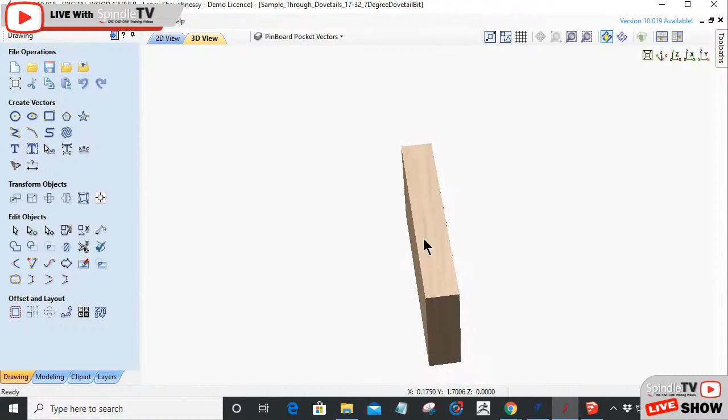Now if I were to look at a 3D view, basically we're going to be cutting on the edge here. And that 2 inches just gives us some length of the board because that board is going to be hanging vertically, so you'll be able to see the cuts and everything. Now, the only thing that Vectric cannot show is the undercuts of the dovetail toolpath, but you'll be able to get the idea. Now let's stop back for a moment.

Well, how you doing, Michael? Good to see you, buddy. I gotta watch my language. Sorry, Michael's our youngest viewer.

Let's see here. Oh, snap, it won't snap. There you go, Dean. Let me see here. Dean asked a question: can you hold down the shift key and drag the scissors over multiple lines you want to erase, like in SketchUp, Laney?

Uh, Dean? I didn't even know you could do that in SketchUp. I've never really tried to be able to answer that question. Can you hold down your shift key to cut multiple lines like you can in SketchUp?

So if I have my scissor tool here, to trim overlapping vectors, click on the section of the vector you want to delete. To delete crossed, non-overlapping vectors, hold down the shift key when clicking. I think the shift key only has a purpose if I hold it down and left click, just holding my left mouse button down and my shift key and moving over the line. That doesn't do anything by itself. My scissors open and close, showing me where lines I can cut are, but I have to actually let go of my mouse button. What that does, holding the shift key, allows me to cut sections of lines.

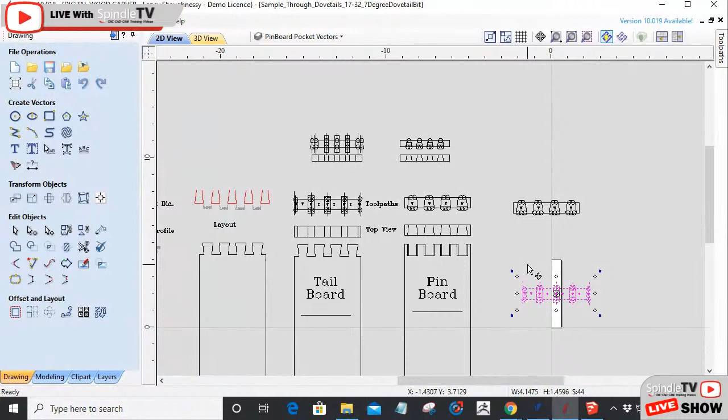So with that being said, let's go ahead and take our tailboard vectors. I'll just drag it here. And I'm going to hit the 0 key on my keyboard to rotate that counterclockwise. The key thing is I want, on this side, I want this to be my start point. So if that node is green and I've got it oriented in the right direction, excellent, it is. Let's get out of node editing.

All right, let's go ahead and get this centered up on our material. So I'm going to go into the alignment tool and center to material. And I think you guys know what the waste and all that is now, so we'll get rid of this. I still haven't centered it to the material yet, ladies and gents. All right, let's select that and... are any of my tools working today?

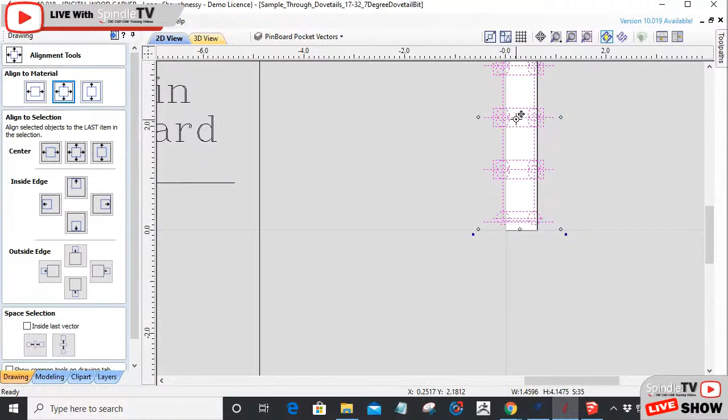Let's see here. It's snapping to something. I got to figure out what it's snapping to. It certainly wasn't snapping to what I wanted it to. That's weird. Something's... do I have?

Weird things are happening with my software. Okay, so let's go ahead and create some tool paths. I'm going to delete these tool paths so it doesn't confuse you, and we're going to start from scratch.

The first tool path is going to be our drilling operation with our 1/4-inch end mill on our tailboard. So we're going to select all of our circles here. Let's do vector selection order, so I'm selecting these in the order that I want to drill them.

Okay, and that's going to be a drilling tool path. The depth of cut is going to be my 0.625 plus... let's try that again, not the enter key... plus that 1/16 of an inch, because I want it to be just slightly proud when I put the pieces together, and I'll sand them flush to get it nice and tight. So that's going to be my cut depth.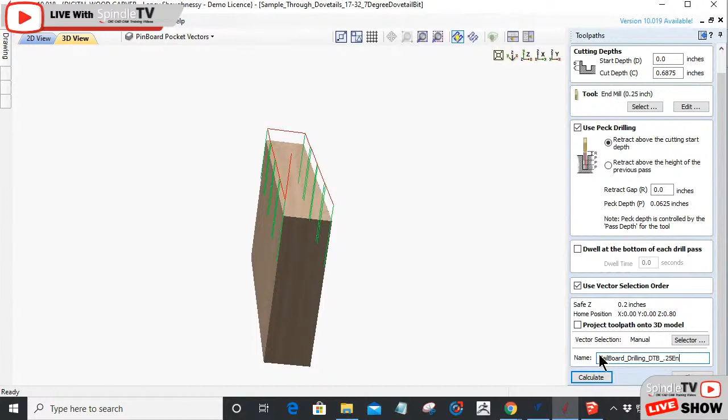So this is going to be my tailboard drilling, and it's going to be the point. I'm just going to call it Dovetail Box DTB, and it's going to be a 0.25. All right, let's calculate that and take a preview of that.

So basically it's going to go down and drill those edges and everything here. That's just going to help prevent tear out when that pocket, that profile cut, comes and cuts.

Now the next cut is also going to be my short line, for the profile cut here on the two ends. Okay, and again, vector selection order.

Now this time I want to use not only the vector selection order, but I also want to keep my current start points, because I want it to come here and do a profile cut, come around, and then come here and do a profile cut.

So I'm going to do a profile toolpath, cutting down 0.625 plus 0.0625 equals 0.6875. I'll just type that in next time now that you guys know what the math is.

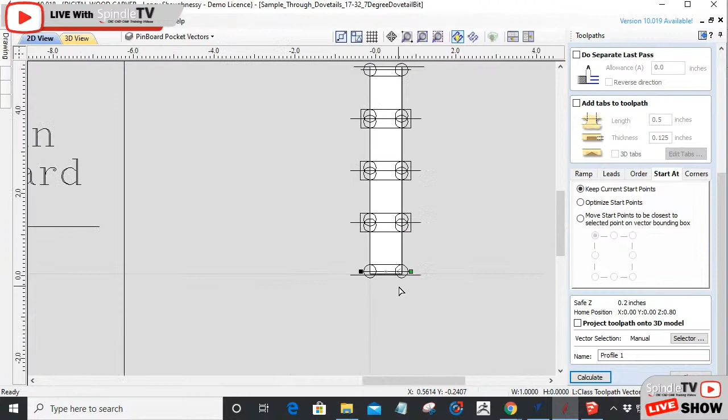Now, notice it shows this start point here on this side, and that's not where it's supposed to be. So I'm going to go into node editing on that line, and I'm going to right click on this black node right here and make that the start point. All right, get out of node editing, and I'm going to select my two vectors again.

Okay, I want that bit to come and cut, and then over here to cut in this direction. So it'll do a climb and a conventional.

All right, let's go ahead and... this is going to be my tailboard end cuts. 0.25, dovetail box, 0.25 EM. All right, we'll calculate that.

All right, and so let's get this kind of tilted and all. Basically what it's going to do is come in and cut that raise up. It's going to be cutting in that one direction on this side here for those passes, bringing that end piece down.

And then on the other side — and sorry, it's so slow, I'll turn the speed down. Actually, let's do that right now, I'll turn the preview simulation quality down so it's a little faster.

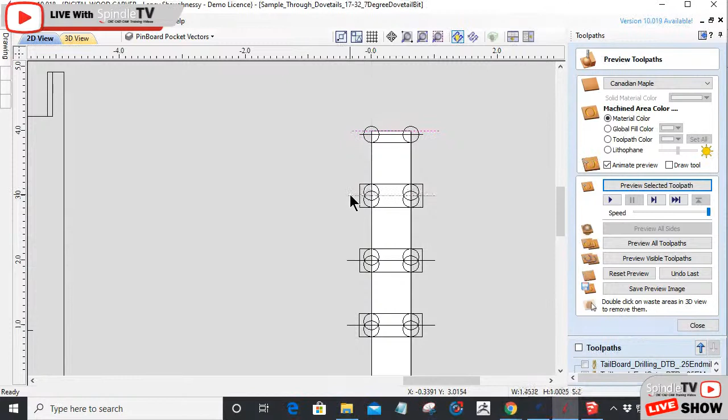All right, so our last toolpath is going to be the dovetail cutter. Now on this one, I want my dovetail cutter coming out and cutting through, raising up, cutting through in one direction because it's doing it in one pass. Now, the one thing I don't have is the dovetail cutter added to my tool database, this particular one I'm going to be using, so I have to add it.

But I'm going to select all of these longer vectors here - these are my longer lines, that's my dovetail bit lines. And it's going to be a profile cut, cutting the 0.6875 with my dovetail bit. But you can't add a dovetail bit to your tool database because you can't draw the undercuts - you have to use what is called a dummy bit. Let me close all of these up here.

And in my dummy bits, I have a dovetail cutter, but it's only a 3/8 inch diameter one. So I'm going to add in that category a new end mill, and it's going to have a diameter of 17/32 - that's the diameter of the dovetail. It's 2 flutes.

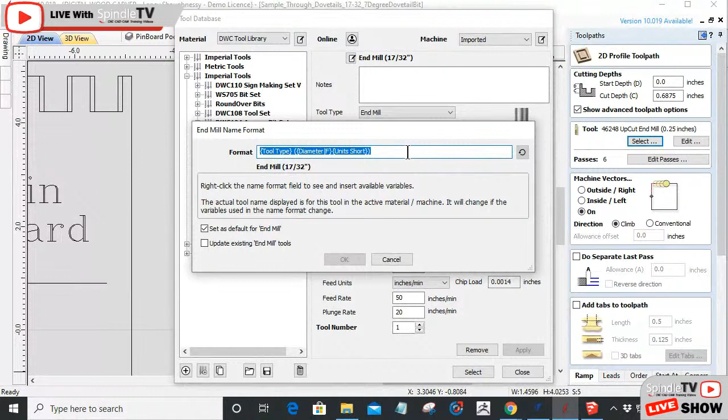The feed rate for this is going to be doing one pass coming through. I'm going to run it at 50 inches a minute, and I'm going to have it plunge at 20. So I'll go ahead and click apply on that to add that in, and I'm going to rename it. Let's rename it first - this is going to be my 17/32.

All right, and with that I'm going to select that and add that to here. Now it's set up for one pass because the pass depth is going to be 6875, which is not exceeding its pass depth - that's good. And that's what I want, one pass. And I want it to be on the line, cutting right down - I want the center of the bit right on that line.

On this, all of my start points are on this edge here, cutting in this direction. Now my bit is spinning here, so when it's cutting, it's going to be cutting into the part, and I don't want that. I want it to be raking away at those parts. So I want to change those start points - I want to reverse them.

Let's go into - I could, for time's sake, go climb, conventional, climb, conventional, climb, zoom, zoom, zoom, zoom - but I'm going to have it run in one direction. So I want to go into node editing mode real quick, and I want to make that the start point. Make that the start point. Make that.

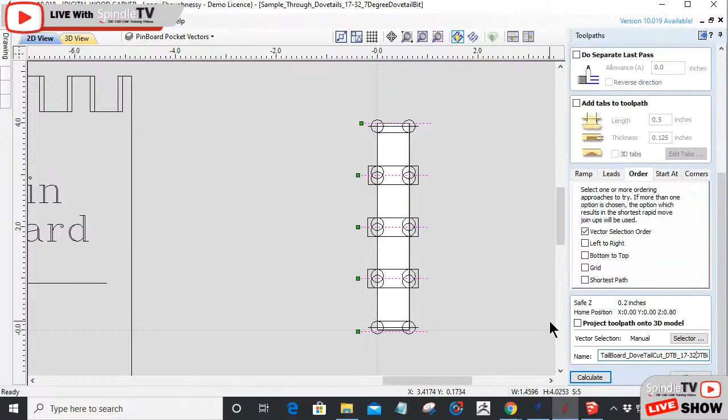Now, unfortunately, we're not going to see the undercut, but when I preview this, it's just going to make the cuts wider in those areas, representing that final piece. Unfortunately, it looks like a finger joint, but it will be a dovetail joint.

All right, how many of you still with me? Y'all good? 52 of you. All right, we're almost done here, guys and girls.

This could be a two-parter because it's 9:37. Let's get the dovetails done, and we might have to come back before we go into the shop. We might have to create the other parts and everything - the cuts for the other parts, the toolpath, because there's some work to do on that as well.

All right, so with that, with those vectors there, I believe I have my class toolpath vectors right here, all together - wait, hold on, what's the name of that? That's my tailboard toolpath vectors. Okay, good, I can turn that off.

And these guys here, I'm going to move them to a new layer. This layer is going to be my class toolpath vector PB for pin board. Click OK on that, and make sure that that layer is active that I'm working in.

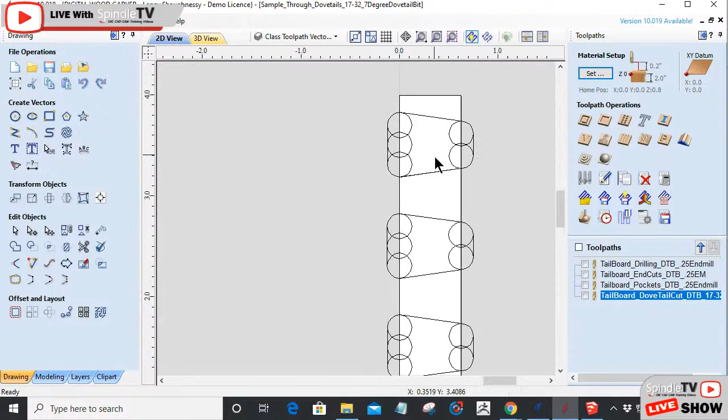This one we have two toolpaths, two very simple toolpaths. So we are going to select that one, hold down the shift key, select those. Let's do the vector selection order - that way it cuts around the board.

I was going to try to be slick and have it do each pin, but that's all right. We'll do order. Oops.

Okay, this is going to be a drilling toolpath, cutting 0.6875 inches deep with a 1/4 inch end mill using pecking. I'm going to use the vector selection order, and this is going to be my pin board drilling box, 0.25 end mill.

All right, let's calculate that toolpath, reset this preview that selected toolpath, and that will be that drilling operation, getting those edges cleaned up for us and all. Help reduce chip out on our pocket cuts.

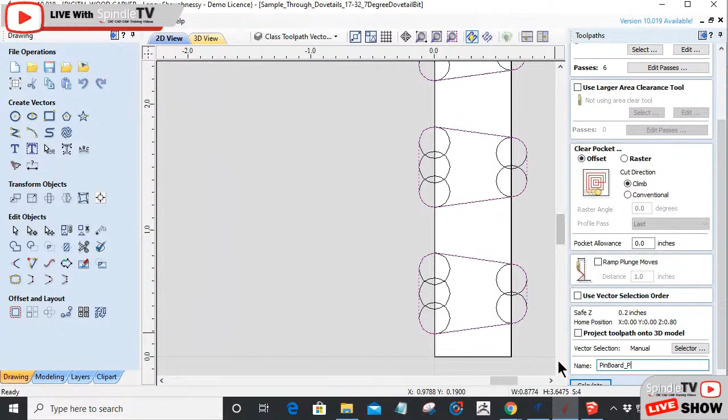And then our next vectors are going to be our pocket cut vectors here. Okay, and that's going to be a pocket cut, cutting 0.6875 with a 1/4 inch end mill. I'm going to have it do it in 6 passes. I'm going to offset, and this is going to be my pin board pocket Dovetail box, 0.25 end mill.

We can calculate that, and we can preview that selected toolpath.

All right, and that's going to be our pin board. Okay, now those toolpaths will do both sides of your pin board and both sides of your tail board.

Just make sure that however you're clamped on your table, make sure that you flip that board from end to end, not flip it over. You don't want to flip it in this direction because then it'll be backwards, right? You want to make sure that you flip it from end to end in this direction when you flip your board, okay? So that they're in the same orientation. Because that would suck. It would.

And your front - this will do both ends of your pin board, front and back. And the other toolpath will do both ends of your tail board, front and back.

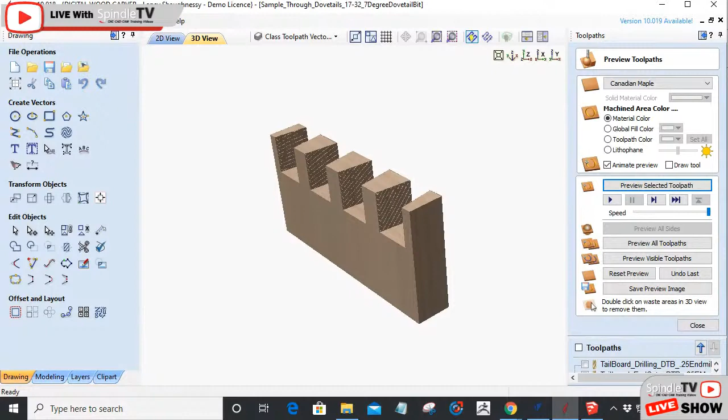Let me see something here. I'm going to draw a small circle here and a big circle here, and I want to see if it's because my circles were the same size, which should not be the case. But if it is, I'm going to freak out.

I won't be able to figure it out. All right, I'm going to hover over this. If I hit the letter T on my keyboard, it snapped right to the tangent. Why? So that worked. T for tangent, snaps it right to the tangent.

Interesting. But if my circles are the same size... T for tangent, it snapped it that time. What's happening now? Why is it working now but it wasn't working before?

If let's say I go on the inside of this line here, right? I'm just hovering. If I hit T, it snaps right to the tangent, space bar. Okay, now I don't know what the deal was with that.

What's the deal with that, why it wouldn't work? Let's go here on the inside here and hover, T for tangent.

No, I think it's because the circles are actually overlapping. If I test that theory... escape... if I test that theory, now they're not overlapping.

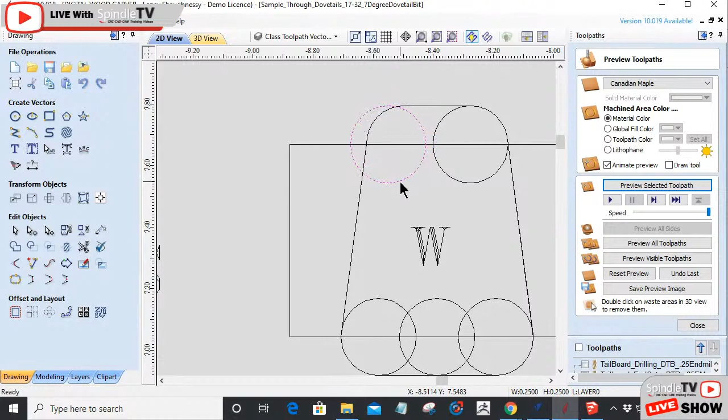And I don't want to do my text tool, I want to do my line tool, man. Text tool. Hover, T for tangent. Okay, so no, that's not the theory.

Wonder what the deal is. I don't know, I don't know. I do not know, but it's working. I just don't know why it's not working here.

If I hover here, I'm going to actually hover down here. T for tangent, T for tangent, T for tangent. Nope, nothing. All right, I don't know what it is.

I'll have to figure it out. I have to talk with Vectric and find out what the deal is. But it does work, it's just not working on these particular vectors. Don't ask me why. So all right, let's go and see what we got.

Any other questions?

Haha, I'm glad your son's into it, Crystal. That's great, get him out on the CNC machine. Make some little toys, little tic-tac-toe games and stuff like that, something he can play with, and really get him into it. That way he's really excited about it when he grows up.

Let's see here. Let's minimize this for a second. Oh hey guys, how y'all doing?

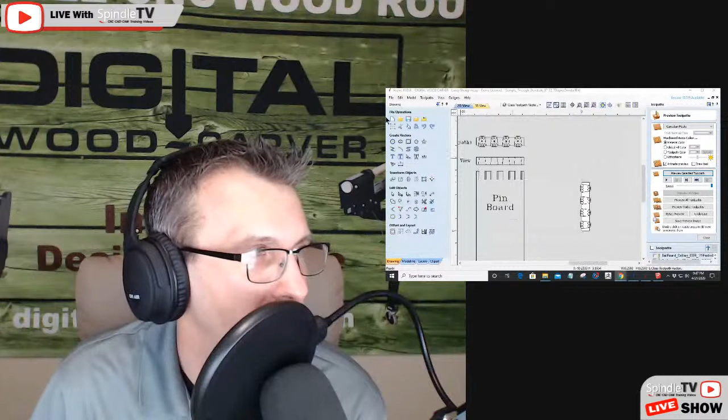Basically, let's see here. Let's... I don't know why I'm doing that, close that. Take this, hold down the control key, drag a copy and snap it to here.

Select both of these, hold down your control key, drag a copy and snap it to here. Make sure you hold your control key and not the shift key. Take your rectangle tool and...

Basically, whatever size your dog bone's going to be. Ah, boy, my buttons just aren't clicking very well today.

And whatever you want your dog bone to be, then basically it's a trim tool or a weld tool, either one, but in this case we actually want to use the trim tool. Oops, I clicked the wrong line.

We want to use the trim tool. Oops, don't trim away that line, come on now. Okay, nice.

Okay, if you're drawing a dog bone - now hopefully that's what you meant with the question - dog bone, but then of course you would want to saw these corners, the fillet, and you could...

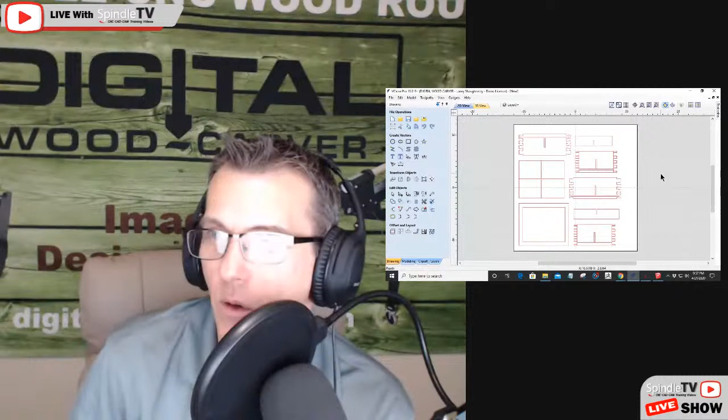Okay, so hopefully you can see the— now hold on a second, let's go back up here and stand by one second, I want to find—

Where was it? Where were you at, John? Bear with me, I want to see if I just answered a dumb question. Give me a second, give me a second. Maybe let me— John, I'm not seeing your post.

Wait, hold on—oh, if you're doing a dog bone in the drawing, is it a similar way? Okay, so John comes back and says, sorry Larry, I was talking about the Isoloc joint, looks like a half of a dog bone cut. No, John, this would not be that way.

Let me take a quick second and show you what that would look like. Similar as far as the drawing, but let me show you. He was talking about the Isoloc joint, a decorative joint, also referred to as kind of the heart joint or other decorative joints.